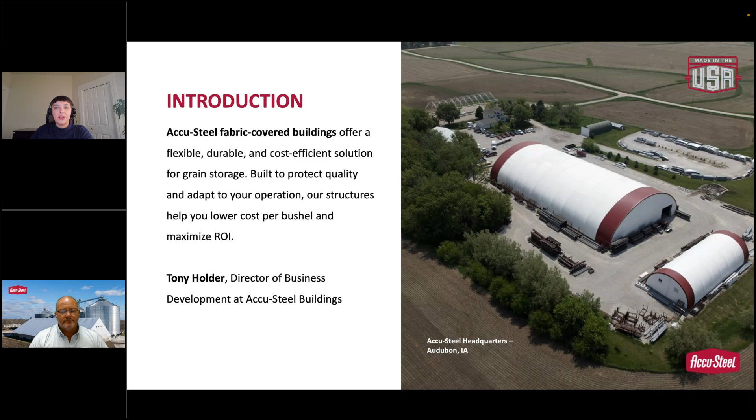This is going to be a brief overview on how our Accu-Steel buildings can maximize your ROI in every season, not just during harvest. As we go along this morning, please send in your questions. We'll have plenty of time at the end of this when I'm finished to answer all your questions.

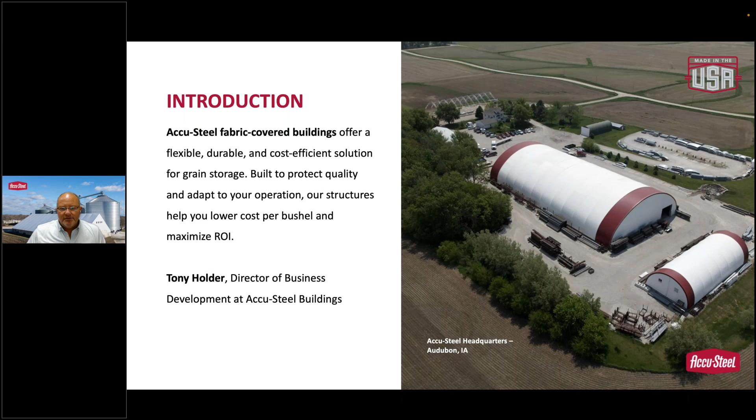I'm going to start out today by talking about Accu-Steel buildings multi-uses for our flat storage buildings outside of harvest. Some of the other uses for when you build a grain storage building, you can store fertilizer, equipment, DDGs, feed ingredients, salt, ag lime, etc.

A lot of the grain buildings we build come in, as in the picture, with red prime steel. If you're 100% sure that you're only going to put in grain or non-corrosive items, that's fine. But we can always plan ahead—if you're not 100% sure and you're going to put salt or fertilizer, anything corrosive in there, we can always hot dip galvanize that steel to avoid corrosion.

Some of the other things is the adaptability of our buildings throughout the year. For example, as we all know, the upper Midwest and some states and areas are having record yield bumps that we've never seen before, so they've been planning and building grain storage very rapidly over the last several years. In some areas, the last couple of years, we've had extreme droughts and extreme floods. With that, they've been able to take advantage of flat storage buildings and take advantage of some seasonal pricing strategies on fertilizer, ag lime, AMS, and other commodities.

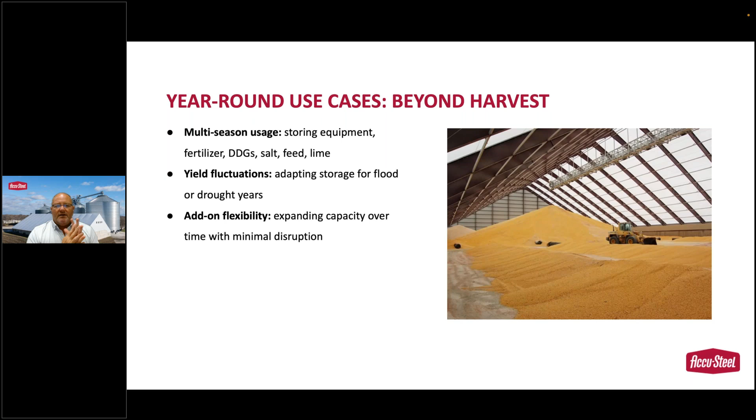Next, I'm going to talk about labor and equipment and reallocation. Everybody here struggles with labor, I can only imagine - if you don't, you're very lucky. But that's the topic of everybody I talk to: how can we build this thing for less labor intensive work, for people to be in the building, to move the grains, empty the grains. Several options.

These buildings versus a pile seems to be the next big topic on everybody's minds. For example, our buildings versus the outside pile, we definitely will reduce time pulling compared to pulling the outside pile covers. We all know how that goes on and off - it takes a lot of people, a lot of time, and pulls them away from their other duties. Also, every year you're replacing or repairing those fabrics or covers, and that can get to be very expensive. Compared to the outside, people are ending up with a lot of spoilage, damage of the grain, hot spots. They're harder to control, the grain condition environment under those outside piles as well.

One of the other ones is the electricity costs for aeration and lighting on the outside piles versus the flat storage building, fabric building. And then as well as putting guys on those piles, covering them, pulling them, taking them on and off, keeping it covered while you're emptying it. It's a lot of time, a lot of manual labor, and there's a lot of risk for safety and other hazardous and strenuous situations with handling those tarps.

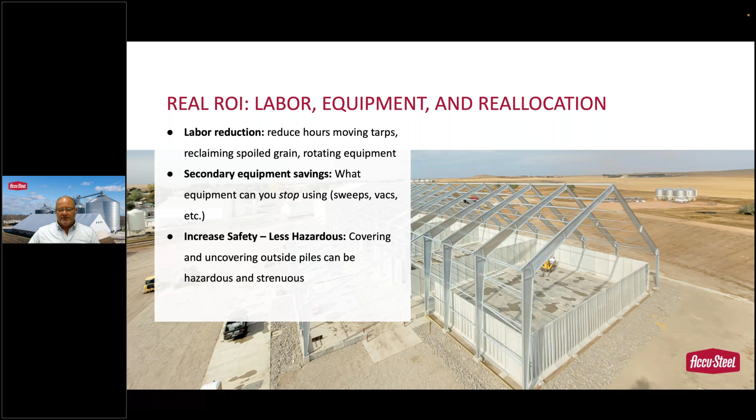Next, we're going to talk about how we work with you, the customer, on designing the building. What we do as Accu-Steel is we do not and will not force you into a cookie cutter building. We customize every building to fit your needs and wants based on your site, your goals, and your operation. Yes, everybody can start with the cookie cutter style - if you want 2 million, 3 million, or 4 million bushels, we can tell you pretty close to how much that's going to cost you per bushel. But what we're willing to do is customize off of that, up or down. We can remove or add things.

A big thing today is in-floor reclamation, in-floor aeration. Some of those options are very, very nice and eliminate labor. In some cases, depending on the width of the building, we can take out 60-70% of the corn before you have to put a loader in there. So that's a huge deal, but it comes at a cost.

If you don't think you need in-floor aeration, we can always go with the old tube style, that's not a problem. In-floor reclamation can be customized to any length - it can be center, it can be off to the side. You can go halfway, put a pit in the middle so you can push everything to it. We'll do anything to your needs and wants, and we sit down with you one on one and figure out your operation and your needs, not ours. We want to build it so it fits everything that you need.

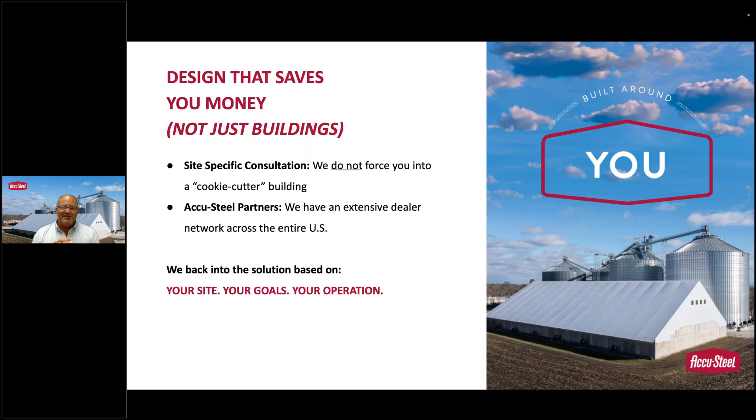The myth is they're flimsy, that it's not as tough as steel, as durable, as long lasting. Well, that's what it is—it's a myth.

Fabric buildings must be, and are, engineered to IBC codes, just like any steel building. We have to obey the IBC codes by county, and we go by snow and wind loads by either county or city, depending on where you live and your county codes and city expectations.

Our buildings are built to withstand up to 150-mile-an-hour winds. People always ask if we can build one in hurricane environments to the south. We can, and with any fabric building, the way we get around that in most cases is pulling the covers and putting them back on, just like battening up your roofs. We don't have to deal with that much.

But as far as grain buildings in the Midwest and throughout the country, it's wind and snow loads. So on our buildings in particular, if there's a snow load, let's say it's 30 or 40, what that means to us is we have to narrow the truss in. Instead of maybe putting on 20-foot centers or 16-foot centers, in some cases when you get up into North Dakota, Minnesota, and Wisconsin where there's heavy snow, we may be down all the way to 4 or 6-foot center truss. That creates a larger cost, obviously, but it's doable.

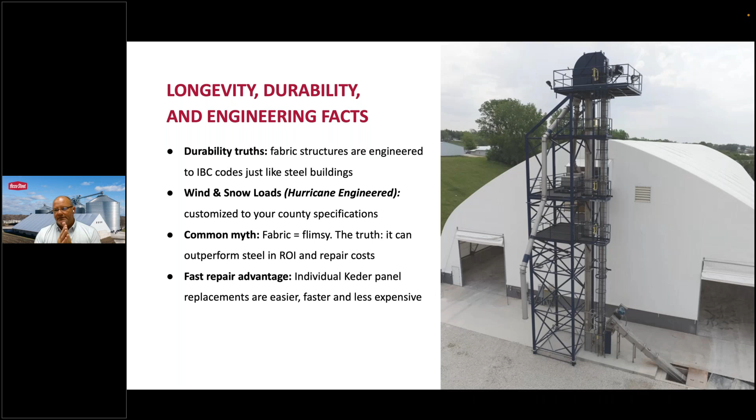Along with our buildings, some of the operational features for grain handling and grain conditioning include the ventilation system. We get asked a lot about this because some of the key features of our buildings are natural light and natural airflow. The way these buildings are designed is with ventilation, natural light, and natural airflow in mind, so we can do a lot of things with ventilation. We'll start with the wall vents.

We can put in any kind of wall vents, as simple as mesh vents built right into the fabric end wall, or louvered vents, electric fans, anything you want, in any size. We can build and customize it for whatever you need.

Eave ventilation on the eaves underneath, just like on your home. We can have that come out, with ventilation in the eaves throughout the whole wall.

In-floor aeration tunnels are becoming a huge deal now, replacing either the steel tubes or the plastic poly tubes. We can do that several ways. We have a company we work with that does precast, so you don't have to form every one of them.

Some of these buildings are getting 400, 800 feet long. That's a lot of tunnels to form. So coming in with a precast company, they bring the tunnels already precasted, lay them in, and the concrete guy doesn't have to spend all that time and labor forming up each tunnel.

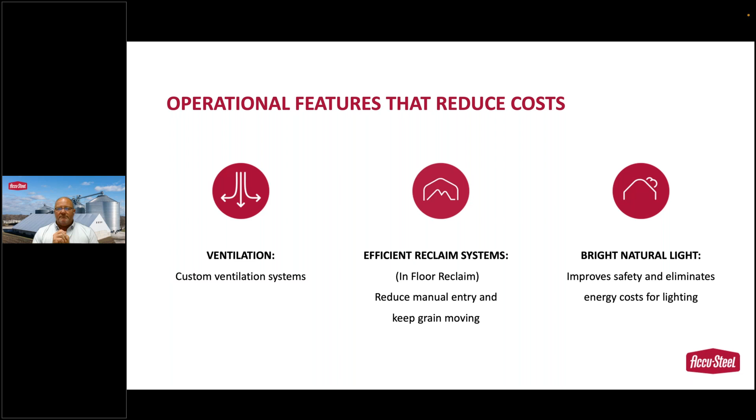Now, before we get to the end, I'd like to share a couple examples of buildings we've done outside of what we can do with new buildings. We've had quite a few instances this past year. The first one's down in Dalhart, Texas.

We put that one up on the original concrete foundation that was there. It was destroyed, damaged beyond repair, I don't remember quite how. So we came in and just utilized the old foundation there to put up a building.

Where I'm going with this is we don't necessarily have to replace everything. We can customize our building to the widths and lengths that are already there, and that's a big convenience because it saves you on all the concrete, any new concrete work.

It also saves time on rebuild if we have it in stock, versus customizing it. We can get that done sometimes in weeks, but definitely within a couple months, and have you a new building up and available.

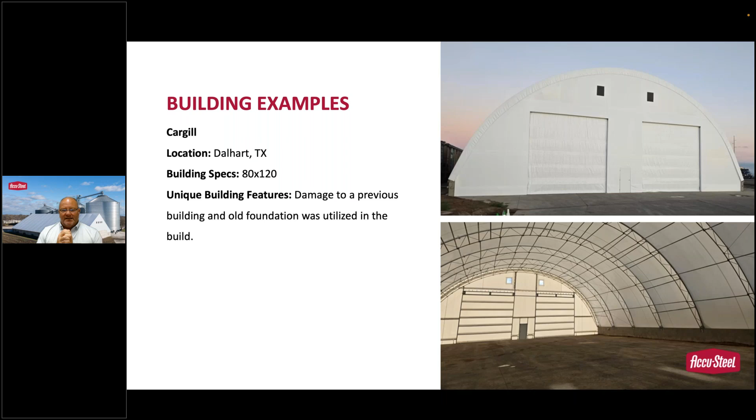What we did here was work with the engineers, who were to the point of going to bulldoze all that concrete down and start over.

And we came in, our engineer came in, worked with them and designed it so they could put the pillars inside the concrete, and we put that building on top of it. That pretty much saved a company from the cost alone of just jackhammering that all out, having to get rid of it, all the labor expense, and then probably near $4 million worth of concrete. That saved them from doing a whole new greenfield site and putting the building over top.

So those are just a couple examples of what we can do outside of being a new building. So you guys, with some of the weather that's been going on, we're getting calls every day to replace buildings of all sizes and all different kinds. So that's definitely an option.

That one in particular, and a couple more we're working on, it damaged the building, but it didn't damage the grain handling equipment, the overhead conveyors, the legs and such. We can work around that.

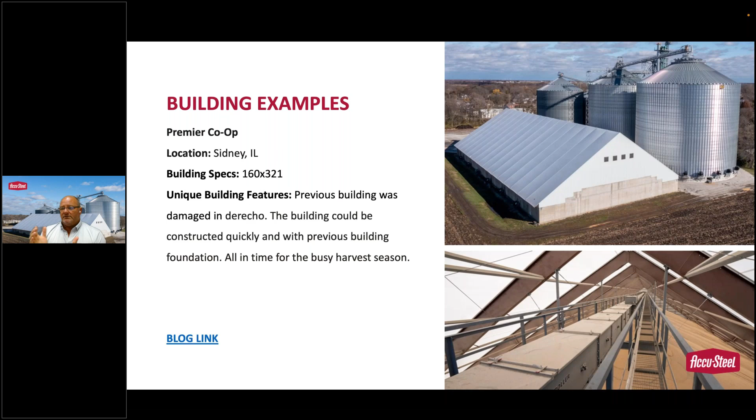And like I said earlier, we design these buildings for you, your operations, and what you need. And we'll meet you where you are, and we'll build it for you. I offer it out to each and every one of you. You'll have my contact information, please give me a call. It doesn't cost you anything for a free consultation. I'd love to sit down with you, love to learn more about your guys' companies, your operations, and what you need, and see if we can help you out with your situation and your grain storage today.